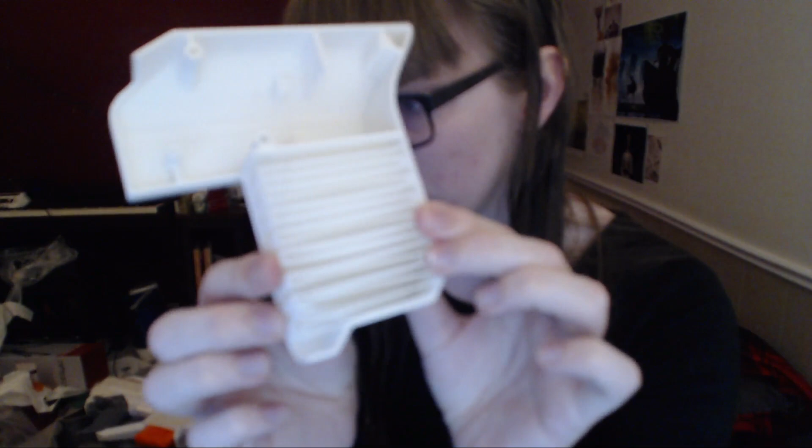Yeah, so that's how the support... come on, holy shit, there we go. So this is how the support was in there. It came out looking like so, hair on it.

Fuck you! Autofocus garbage. Yeah, that's how the support material came out. And this is the inside surface. It's perfect, like there's a little bit of droopage, but it's so minimal.

Have you ever used PVA supports? No, I don't care. The print quality isn't that great, it's alright, but it's mostly because the camera is so blown out.

I'm gonna gut the Titan and put a Rapid Strike in it. I thought it was already a Rapid Strike, or are they using a stupid Hyperfire Pusher? Of course they're using a stupid Hyperfire Pusher. Why did I even ask?

Of course I chose a black dress to do this.

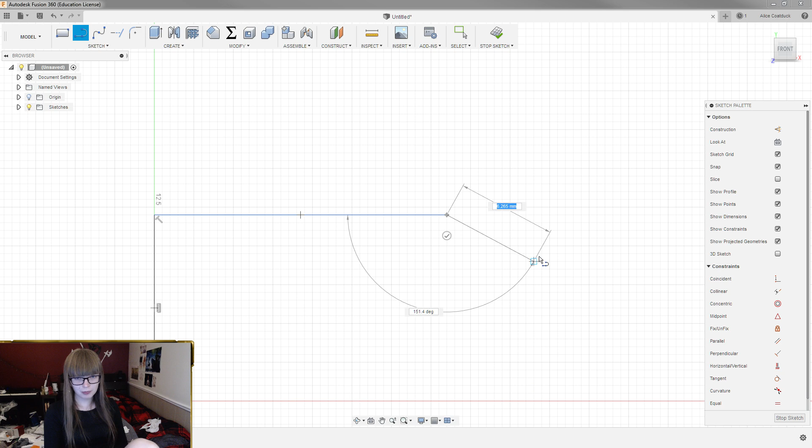Am I dumb? That's 6. So I follow that down. That's 12. Why is that 116.6? 45 divided by 2 is 22.5, right?

Okay, 6.5, so let me go back. Am I losing my entire goddamn mind? Someone explain basic math to me. What the fuck?

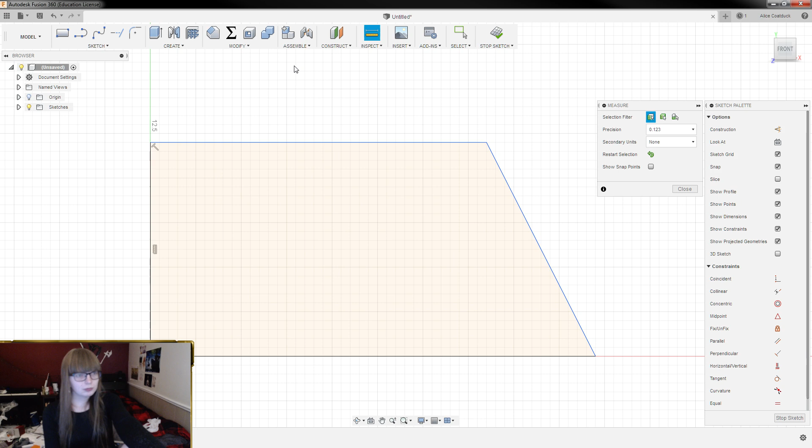Okay, so... what is this? Okay, that's 12, and this is 6. Am I dumb? What the fuck? Is this... I must have taken stupid pills this morning, because this is not making sense to me.

This is 24.5, which lines up with my... I don't... Okay. Okay, so 45 divided by 2 is 22.5. What?

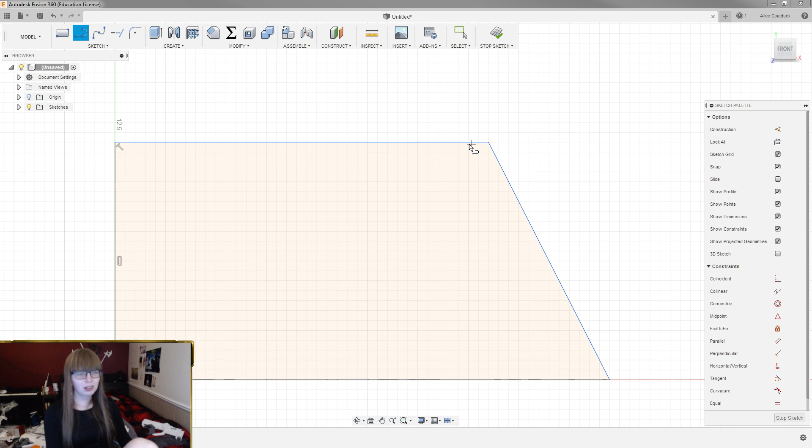That's 45 degrees. Oh. Right. Okay. Slope does not directly translate to degrees. Right. Okay.

So this slope of 1 to 2 does not translate the same way it would be for 45. Okay, that makes sense. Just had to visualize it. Okay.

So then we want to extend that 124 millimeters. So that's our general shape. I'm gonna throw like a... so the slope of this angle, hold on, let me do this and then I'll try and explain.

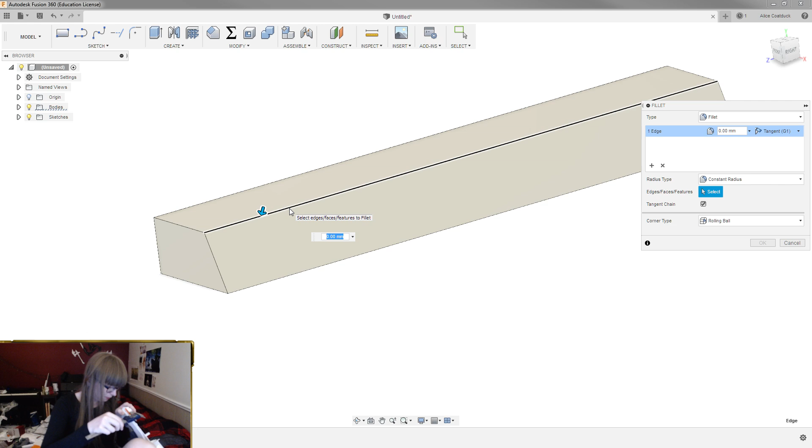It's like a 0.5. So, the slope here, right? So our rise over run is 1 unit, or is 2 units over 1 unit, right? That gets us that angle, right? So it was 12 to 6. 6 out, 12 up.

So my brain's thought was that that is half the angle between 45, because it's double the height for the run, but that's not how that works at all. It's just that my brain needed to look at it to process that. Like, I needed to see the 45-degree angle there to understand that. Just a brain fart.

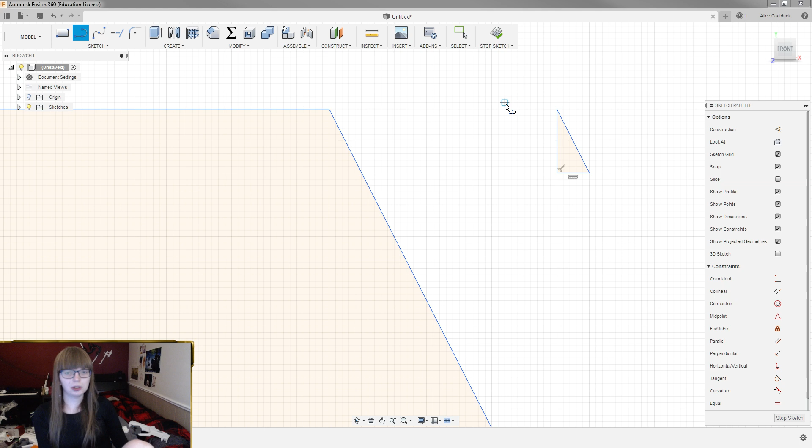Thing on my screen. Yeah. And that's really obvious now that I look at it, because if you go here, that's not half the... if you double that, right? So if you double it again... Actually, that does look shockingly similar to half the angle. There to there is 12.5, and to there is 14. So it's still not half, but I imagine it will approach half as you double it more and more. It will approach half.

So let's double that. So we want to go 4 more units here. And then this is going to be even closer to half. Between here, 6.9 and 7.1. Yeah, okay. Okay. I mean, yeah, it does approach 90, but that's not what we were talking about.

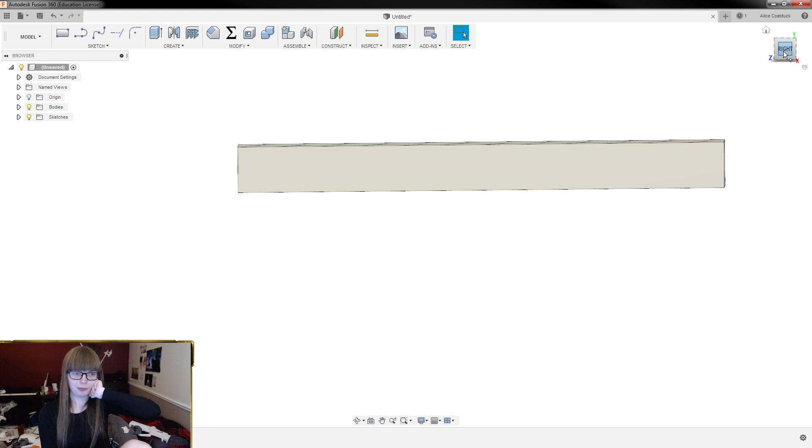There we go. So there is our main sort of body of this filler piece. I really don't think there's a lot to do on it. I probably want to throw a screw port at the back, but it's pretty well supported. There's a screw port here and here at the front, so it doesn't really matter that much. Like, I do want to throw one here because that'll help hold the cage in, but otherwise, meh. I guess I could put one here, but it would look a little redundant. And there's nothing that's going to be in the way here, so meh.

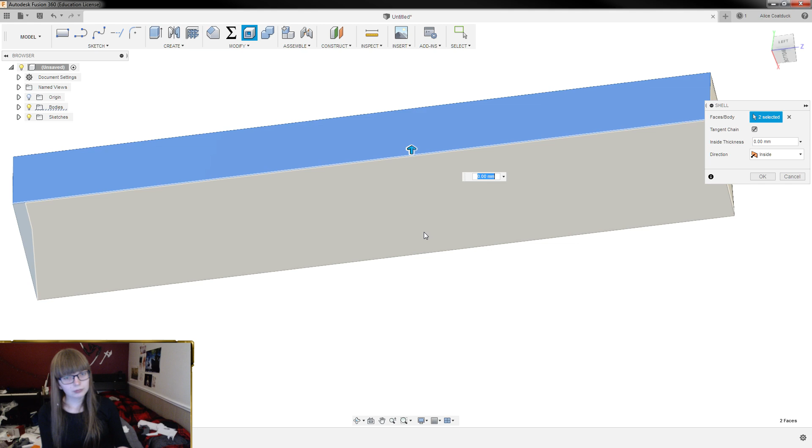Fucking eyeballs. My god. Pythagoras would approve of your investigation. Yeah, pretty much. Oh. Hello, Athaxis, if you're still here and not currently switching an account. 1.5. Nailed it. What did I do to deserve these eyeballs? Wait, Alice, are you going to end war? Yeah.

Oh shit. What was the math there? Damn, I nailed that. Eight, 5, and then 2.8 is what we're going with for screw diameter at this point, and then we want to throw in a 6. So, damn, I'm getting really good at doing these screw bosses. So, we extrude to object. Yep. -2.

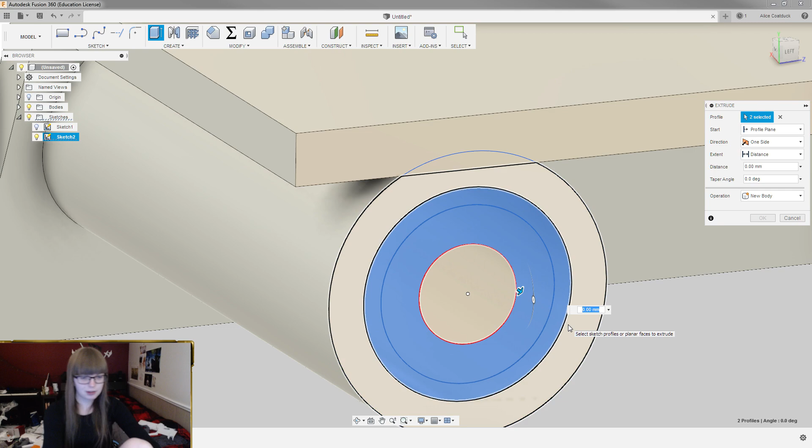Oh. I lied. First thing I'm gonna do is... Hello, please. Punch that out. And then we want to take these and go -2. And then I want to go back in time and not be stupid. And then mirror this body along there. And then we can zoom forward and we've got our piece back. And then we can literally just take these two and extrude to object. Boom.

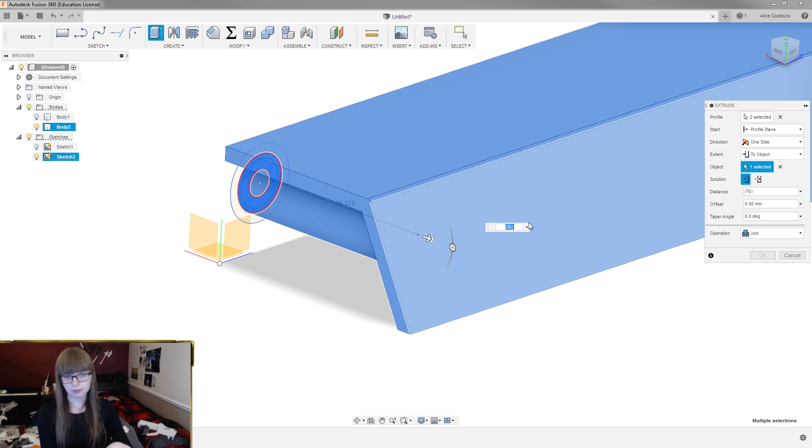Hello. What, hello? And then join. Hello? Excuse me. Fuck face. What the hell? Okay, we're gonna try this again, because that super duper didn't work. It just would not let me hit enter. To object, like so. Thank you, okay. Alright. And then let's go. And then we're gonna trim here and here. And then 1.5, and then flip direction. This is almost done, just for the record.

We are gonna do something, so I do want a rail on the top. Whatever.

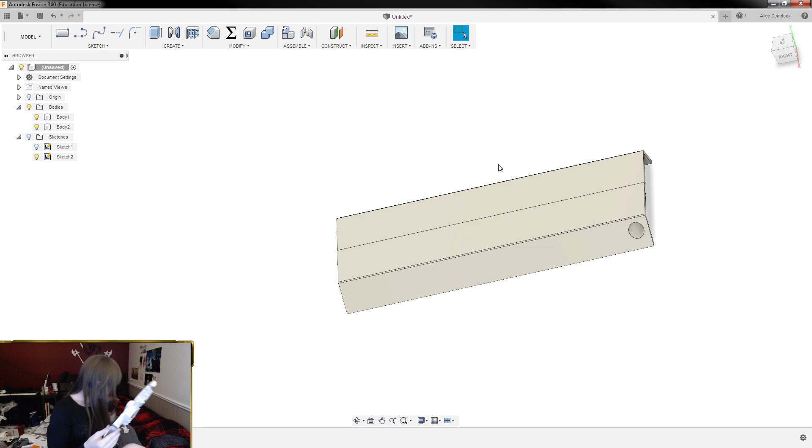I can't believe I'm gonna have to do all that shell work again. It's fine. Everything's fine. Honestly, as somebody who regularly modifies their blaster on the field, the idea of just leaving this top section open is hilarious to me, because that's exactly the type of bullshit that I would do. I would just poke around in there. But I'm not going to.

I wonder if you could design, like, a flip open top or something, so you could open up your receiver and still have it function. That would be cool. It's cool to see inside of this thing while it's closed. I should do clear top plates. That'd be cool. Maybe. Maybe one day. Alright.

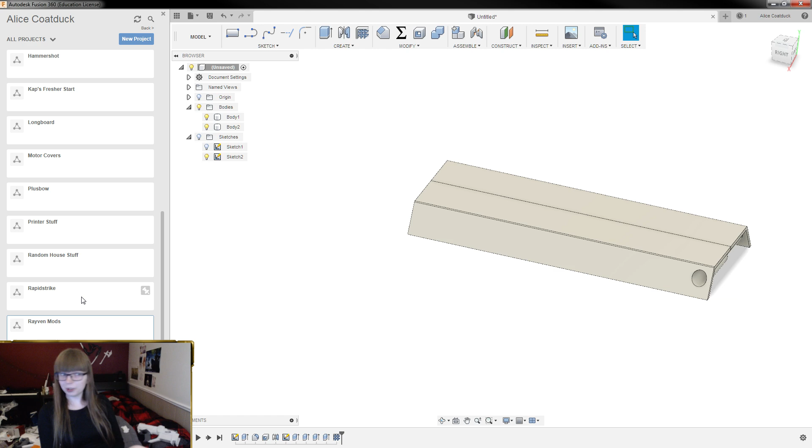Anyway. Okay, so the next bit I want to do is actually not even directly related to a Rayven. So what I want to do is I'm going to go into my Rapidstrike folder. This is something I did sort of a janky way. Oh, this is going to be fun. This is the real shit here. So, I designed a flat top for the Rapidstrike. I think I posted a little bit about it, maybe. Either way, I'll see about bringing it to End War. It's a whole deal.

So I designed this Picatinny rail, which fits actual Picatinny stuff, but it's such a pain in the ass to design. It's just fucking annoying. So what I want to do is I want to make a parametric piece of Picatinny. Parametric piece of Picatinny. Nope, can't do it. That's hard. Okay, where is that?

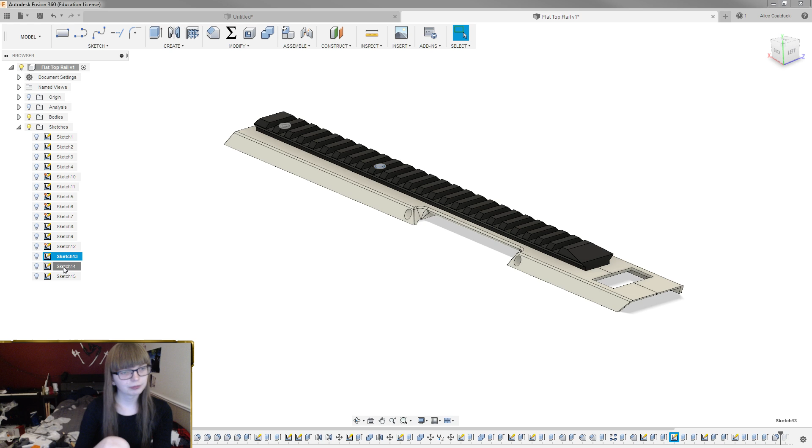I think I did it this way. Holy shit. I really hate those irons. Oh, okay, this looks like a pattern. So we go back here, no rail. Start of rail.

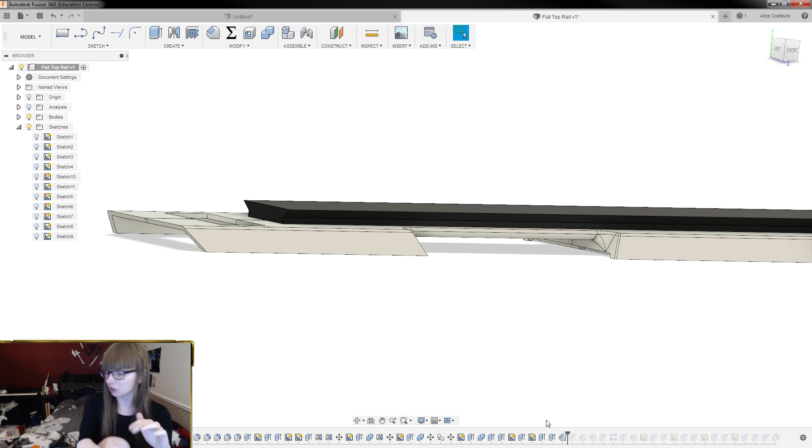So if you have 10 and then you say 10 modulus 3, modulo. I've heard both modulo and modulus. I'm not sure if one is more accurate than the other, but I have heard both. So if you take 10 modulo 3, that gives you 9 with a remainder of 1, so it will output 1. So I have no idea if it'll let me use that in Fusion.

Okay, so that's how I did that. I'm gonna assume this is a 45 degree. Fuck. 135, so yeah, that's 45. If it does, that will make making this Picatinny really easy. Now I'm overthinking this. I think there's an easy way to do this.

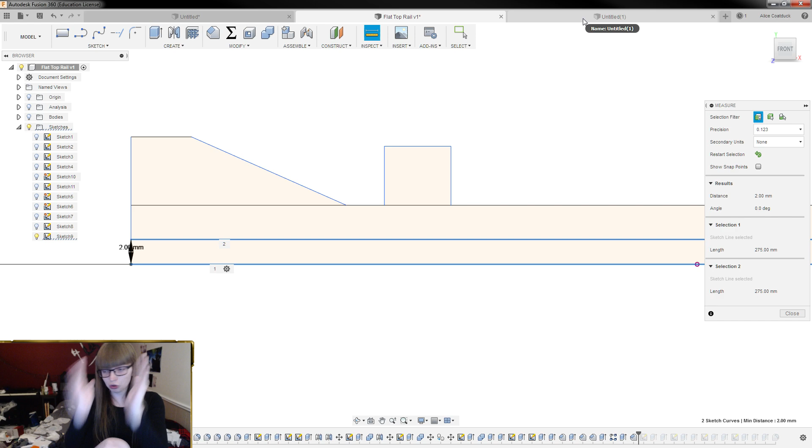On a skateboard, what you can do is you can put your foot on the back and sort of wrench it around corners. But the problem is you can only do that when you're going slow. If you do that when you're going fast, your wheels hit the ground straight away. And suddenly, your momentum has gone from straight parallel to slightly sideways, and it just chucks you off. So you have to do that when you're going slow, whereas on a longboard, you can just... and it's because the angle of the trucks.

Blade Runner wasn't that good of a film adaptation. I actually thought the book was one of those sort of secondary things. Like, wasn't 2001: A Space Odyssey, didn't the movie come out before the book did? I know they used to do that a lot.

Okay, so this is 2 millimeters, and that is 2.75 millimeters.

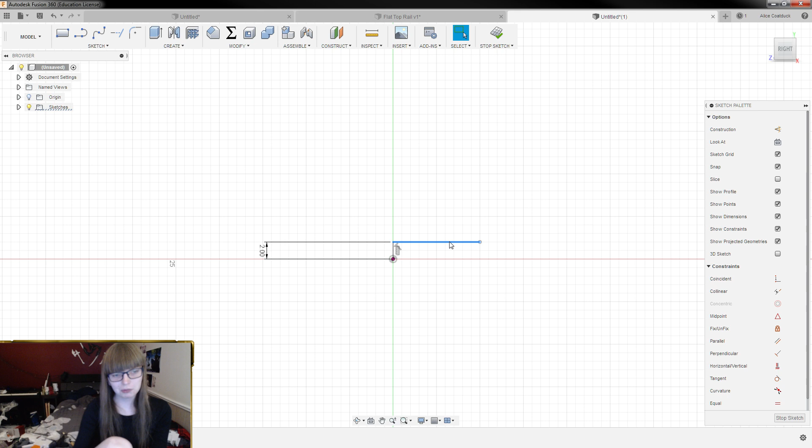We want this to be 4.75.

Yeah, unfortunately I'm sort of stuck with the movie adaptations of things, which sucks, because one of my favorite things, like, I love the Hitchhiker series. I can't tell you how many times I read through Hitchhiker's when I was younger. Oh. Hello.

Hey Justin, skateboards take more skill than longboards. That's not true. That's not even remotely true. They are both an infinite well that you can put as much time and effort into as you would like.

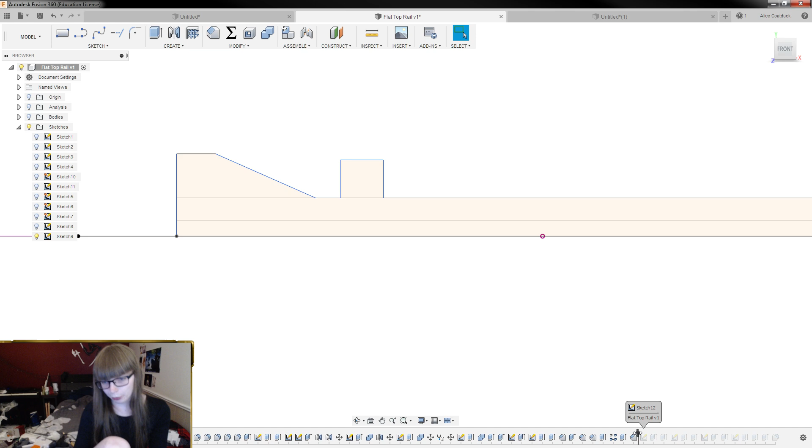That's 3 millimeters, right? Nope, I fucked that up. I gotta start all over again. I really fucked that up. So we're gonna go 10 millimeters this way, and down, and then 2.75 out, and then down, and then 3, I think. Then 4.75 and down.

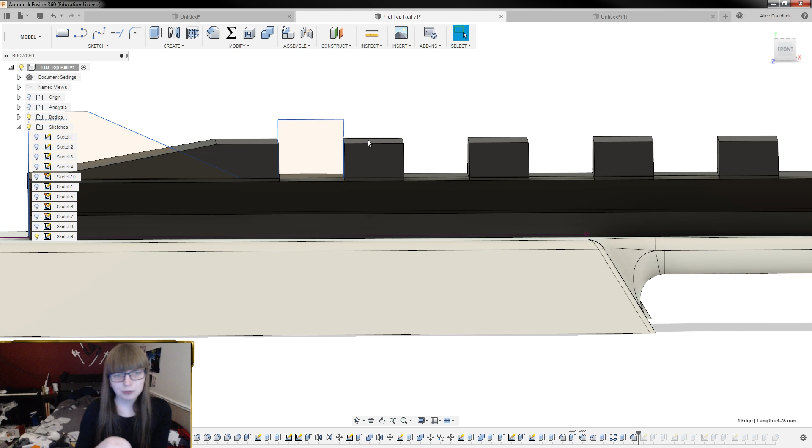And I'm just going to double check those measurements. So that's 4.75. Distance between here and here is 3. That line is 2.75 and that line is 2 millimeters. Yeah, okay, that's looking good to me. I know this is only a little bit off, but it looks really wrong to me. .75, and then down to here and back across, and like so.

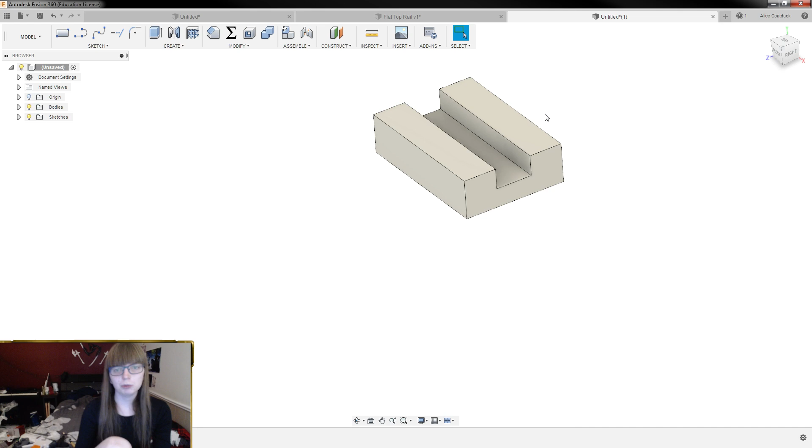Okay, so let's go. Oh, hold on. How long is that line? 21 millimeters, dead on. So we go. Two sides, and then the distance is 10.5. Oh, actually, we want that symmetric. And then .5 on the bottom, so that's 7.75 at a guess.

.5. That was right? Yes. And then .75, right? That will give us the right. Yeah. And there we have a piece of Picatinny. And we want plastic, opaque, matte black. Dude. Dude, what the hell?

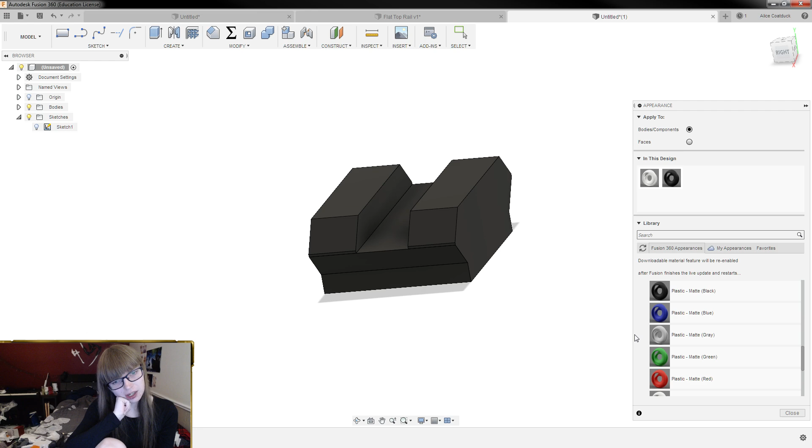Alright. So each unit of Picatinny is 10 millimeters, right? So here's the fun bit. Actually, hold on. Before we do that, I'm gonna go in and change something. Howdy! Alright, so we're gonna change how this was done. Yeah. That's fine.

Oh, hey, Eleanor. I just entirely missed. You guys showed up right as I got done the modelling.

Alright. So let's go in here and symmetric. I'll do. Actually, I want to do this a little more precisely.

Interestingly, I actually have been absolutely obsessed with Dune lately. Just so good. That didn't make sense. Whatever. Fine. I don't care. Whatever.

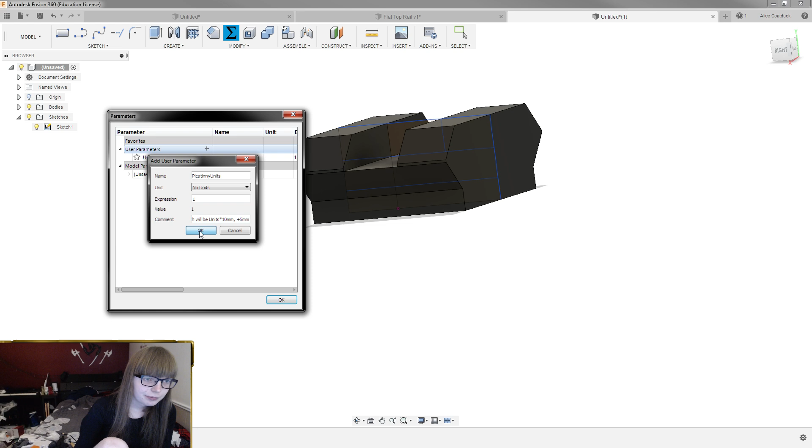So let's create a new parameter. So let's add a unit. I don't know how it's going to deal with this. Picatinny units, and I actually want no units here. And then by default, it's going to be 1. Enter comment is: final length will be units times 10 millimeters plus 5 millimeters. And I do have it as... Why do I have to stretch it out this far to get this? So now what we want to do is extrude this, and this extrude

No, I said Dune. D-U-N-E, not Doom.

But, we want to extrude this 10. No, we don't. Yeah, okay, so 10 times Picatinny units. Actually, we want to do Picatinny units minus 1. And we're going to have to change this expression to 2. So 10 times bracket Picatinny units minus 1, close bracket.

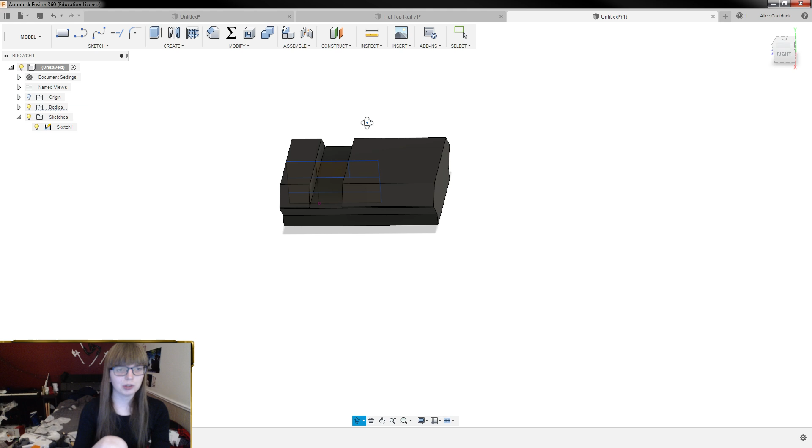So minimum expression. So minimum size is going to be 25 millimeters of Picatinny, which is fine. Yeah. So then we want to pattern a linear pattern, or rectangular, and we want to pattern a feature that is that one. Distance 10.5.

I think all my moderators are here. This is when... Picatinny, not M-LOK or KeyMod. Eh. Yeah.

Nope, shit. Okay, I fucked up. I was, like, really confused for a minute there. So we want a rectangular pattern. The object we want to do is that one. The direction is that. And we want to go every 10. And we want this to be spacing as well. And the quantity we want to be, actually, I think just Picatinny units. Distance 10 millimeters. I actually think that's right. Hesitantly.

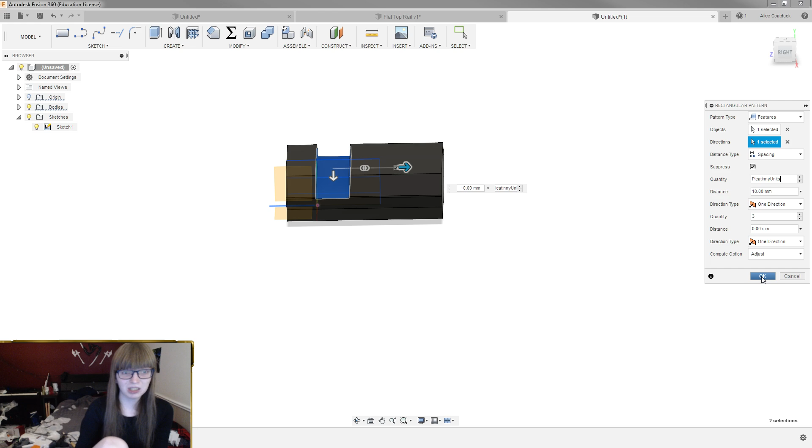.7 or 4.75, and this should be 5.25, and this should be 4.75. Yep, okay, so that is working at the moment. So now we want to say, we're actually gonna, minimum 2 units. So we just add that little description. If I say I want 4 units, that'll give me 45 millimeters of Picatinny, and fuck. So we don't want a quantity here. We want a Picatinny units. And we want this to be spacing.

Okay. So then if I do 3. Alright, so that gives me 35 millimeters of Picatinny. But then if I go up, if I go to 5. Woo! Okay, so let's go back down to 2, because that's our minimum.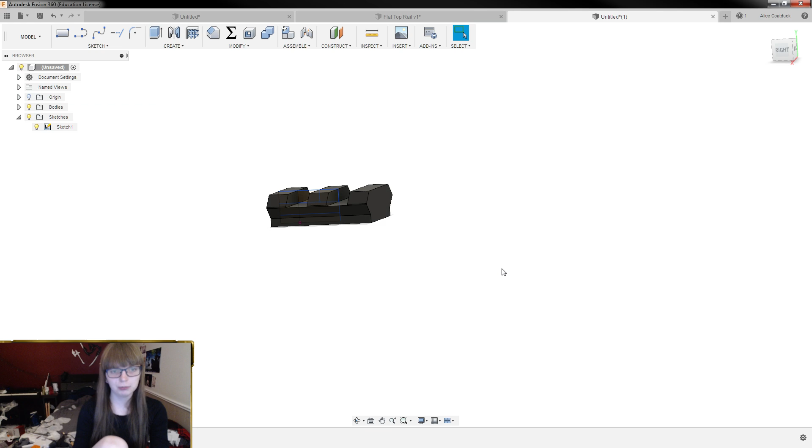And then how many do we want? We got... That'll give us 125 millimeters of Picatinny. And then back down to 2. And there we go. Now, I do want to try and break it. See what happens if I go down to 1. Yeah, so not good things.

But yeah, this is a parametric piece of Picatinny. God. Parametric piece of Picatinny, parametric piece of Picatinny, parametric piece of Picatinny. Oh, got it. Nailed it.

Okay. So the location, we're going to throw this in the bits folder. Misc parts. Cool. Paratini. Well played.

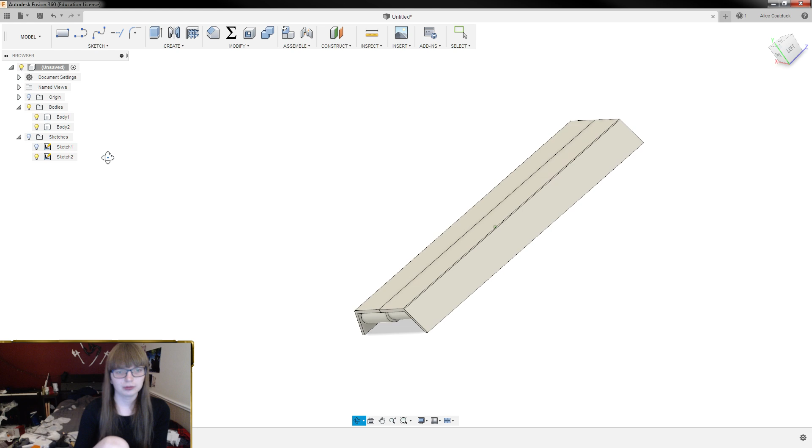So, now if we go into our bits folder, misc parts. Damn, I got some nice bits in here. Hello? No? Oh, okay, right. I have to save this. Not in misc parts. We want to save this in Rayven mods. And this is flat top.

Alright, so we want to place this. So, if I recall correctly, I did that facing the right. So, I'm going to want to rotate this 180 degrees. Which is going to seem weird, but trust me, I'm either right or wrong on this. Alright. Alright. That looks good. Okay, I'm starting to have my doubts on whether I did this correctly, but whatever.

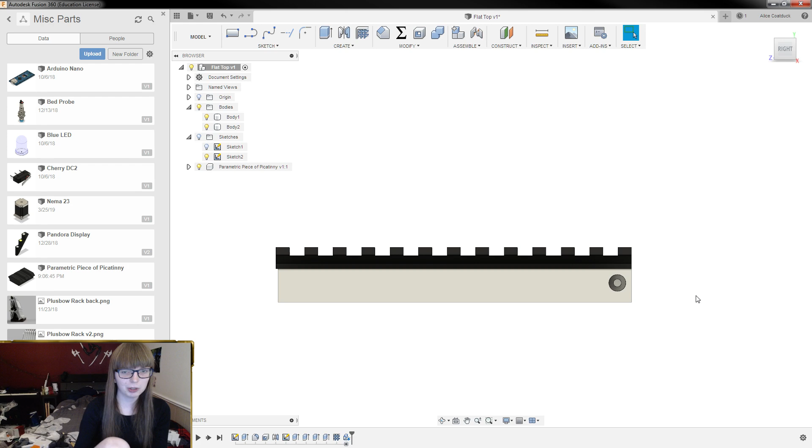So that should have imported this parameter as well. So if we make that 12, that'll give us 125 millimeters. Ooh! Nailed it! Okay, I'm pretty proud of that. So... Okay, that was awesome. Yeah. I'm probably more proud of that than I should be.

Okay, I just realized I fucked something up. It's not world ending. Will be a little bit annoying though.

Really? That one? Like, half a dozen good ones. And you went with that one. Thank you, Wick. Also, hello, Wick. I don't know if I said hi to you. I don't know if you just showed up. I have been a little frazzled. Scatterbrained. Which is also a fantastic song that makes me sob like a baby.

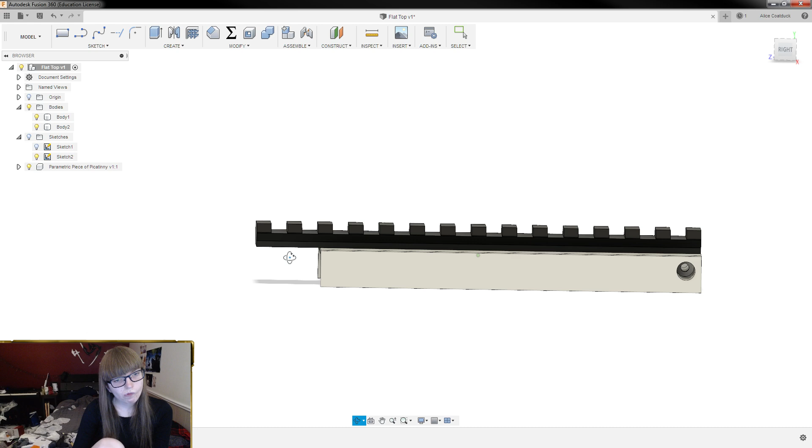Alright. Okay, so I'm actually gonna drop this down another unit. And then, so what I forgot to do is there's an angle at the back here that I just entirely forgot about. Yeah, I'm a big dummy.

Remote blaster is perfect to get for an upgraded scout. Oh, okay. Well, fair enough. Shows what I know.

Okay, let's, I think, scoot this forward, I think. I'm not sure. And this is when Edskar mocks me, because what I'm about to do is model the top of a Rayven. Wrong blaster.

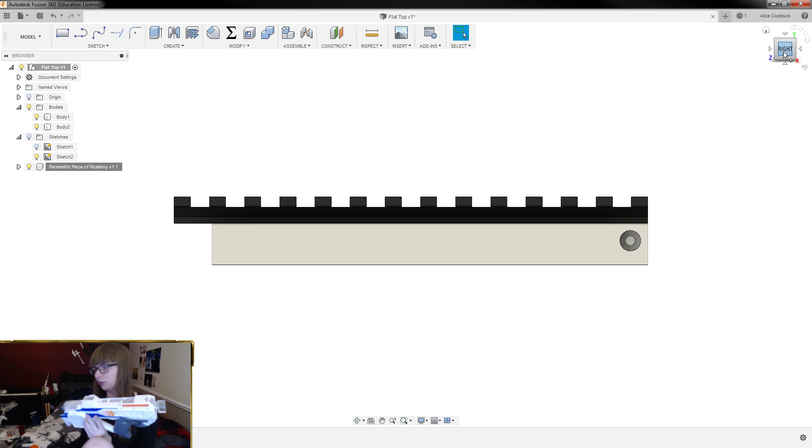I really need one of those digital angle gauges because the amount of time that I spend trying to figure out angles poorly, it's unreasonable. I went to go buy one day and I just couldn't find them anywhere. I think I checked like 4 different stores and they were all out of stock. It's just like the universe doesn't want me to have one.

Jesus. That's horrific. Gunshot not illegal. Panda makes a fair point.

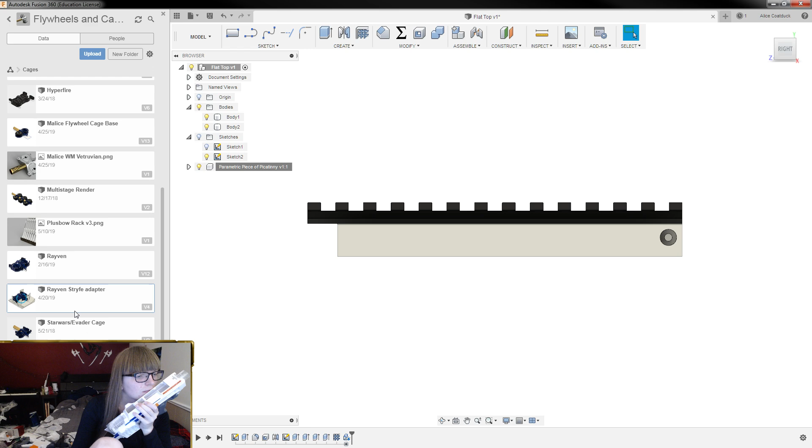Okay, what the fuck am I... Like, there's nothing to get the angle off of. Like... Fuck! Fuck it, I'm eyeballing it. Wait. I think I have the inside of the shell modeled over here, so I can yank it.

And that angle is wrong. A little too dramatic. But we'll see about it as a start. That angle is 100 degrees. Okay. So it's probably 10 degrees. Ish. Maybe 8. At a guess.

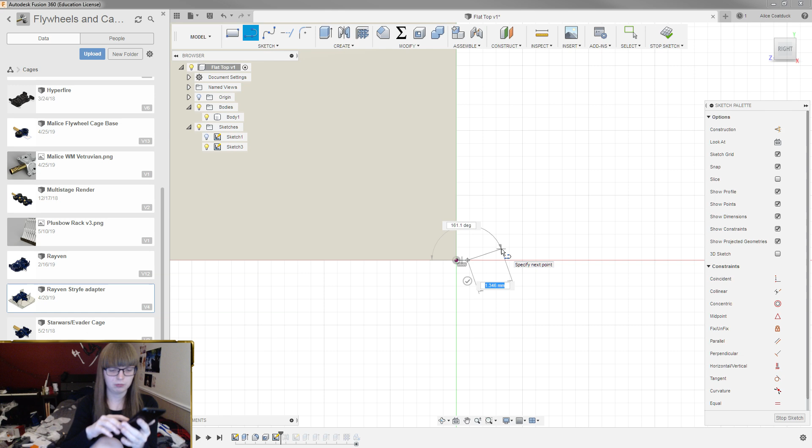That sweet ABS high. Do I want to know? Oh. Hello? Oh, okay. I'll be up in just a second. Phone call. Somebody ordered food to my place. And yes, I am listening to home.

The food gods have smiled upon me this day. It's my favorite pizza place. I'm actually reading the... Oh, fair enough. Hey, Chris, do you want to shoot me a PM about... I missed it. Oh, I am so pleased right now. I am so pleased. Really good.

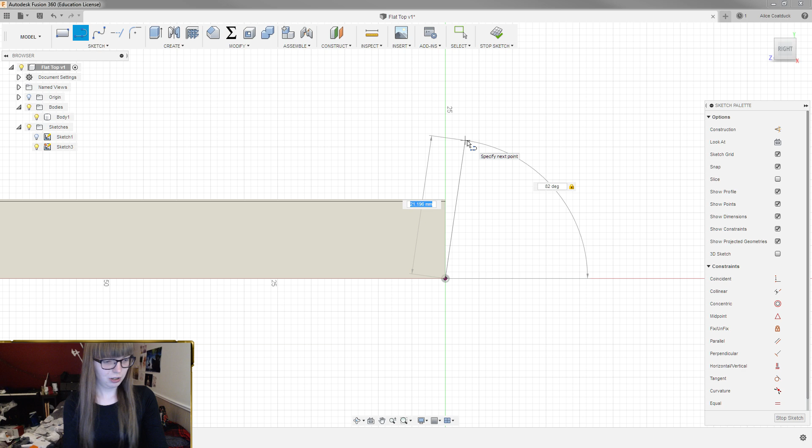Okay, so it goes up to like here-ish. Whatever. I'm just gonna trim that there and there. Hello. Why did you do that? It didn't. It's just being an asshole. What the fuck is that about? Oh, it's that line. Okay, that makes sense.

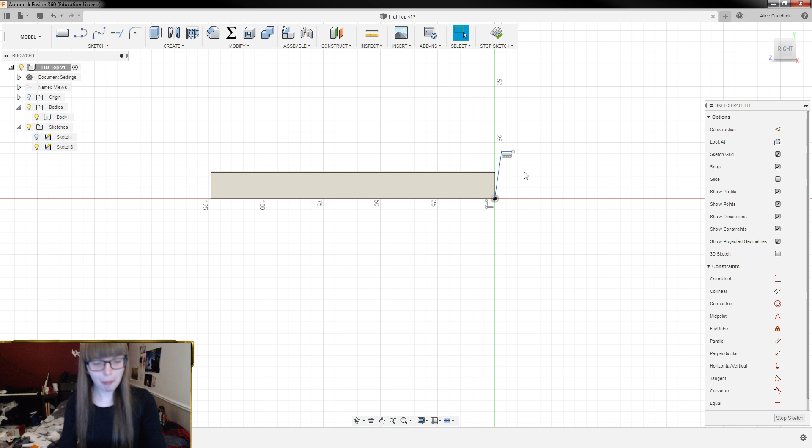Oh, that pizza's good. I love you guys. Holy shit. Goddamn delicious.

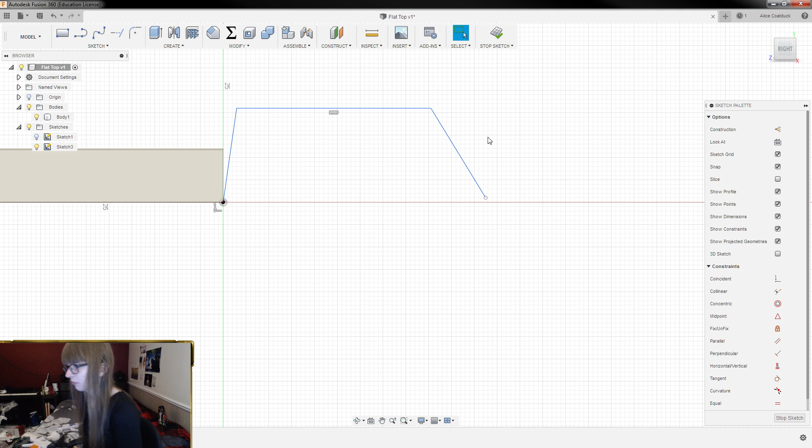And how far back does this go? 42.5. Alright. This is like 12 millimeters-ish. Yeah. Okay, so that's 12 by 20. Over 20 down. Nope. Fuck. All right.

Fuck, this is good pizza.

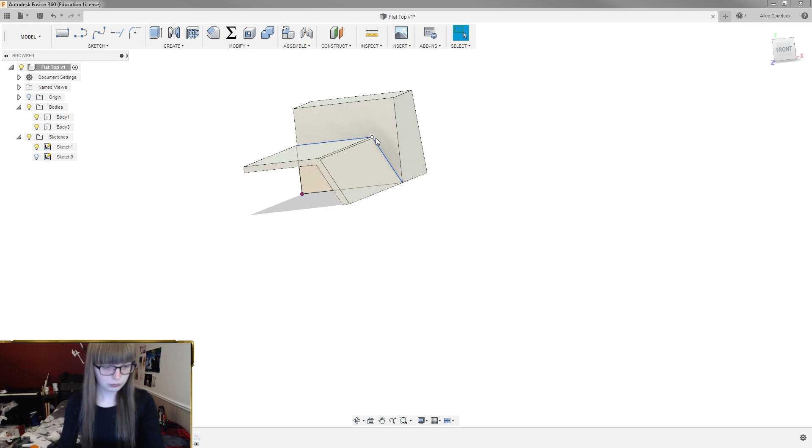All right. 24.5, and that is, in fact, set to new body. Wait, no, fuck. All right, so that's roughly the shape we're talking about here. 1.5. And then, honestly, the front is really...

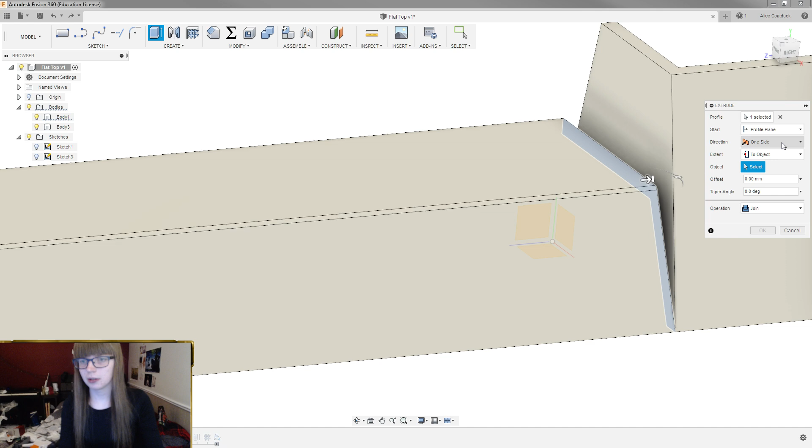So we're gonna go to object, and then like that. Nope, that's not right. To object. And then the object in question is that. And then I guess we want to do body, or maybe we want to hack it. Was that cheating? Definitely. Do I care? Definitely not. The hell? That's not a bad deal. All right.

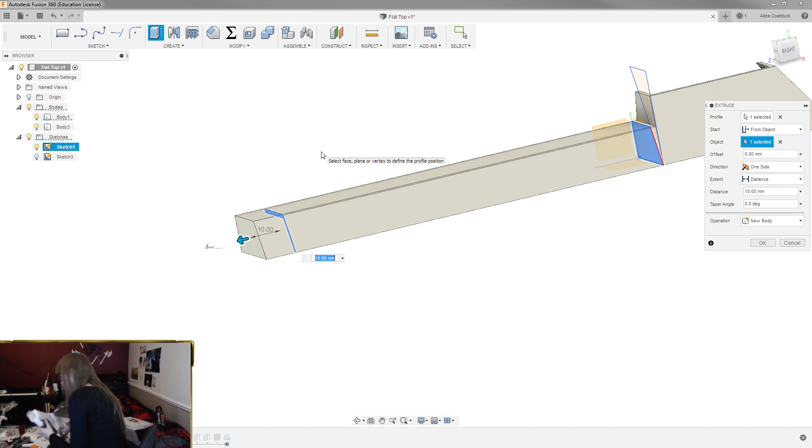Let's go from object. And we want a new body. And then we want it to be .52 millimeters long. And then have a good old chamfer. And that's going to go all the way to the bottom, yes. Probably all we need, however, when do I ever settle for that?

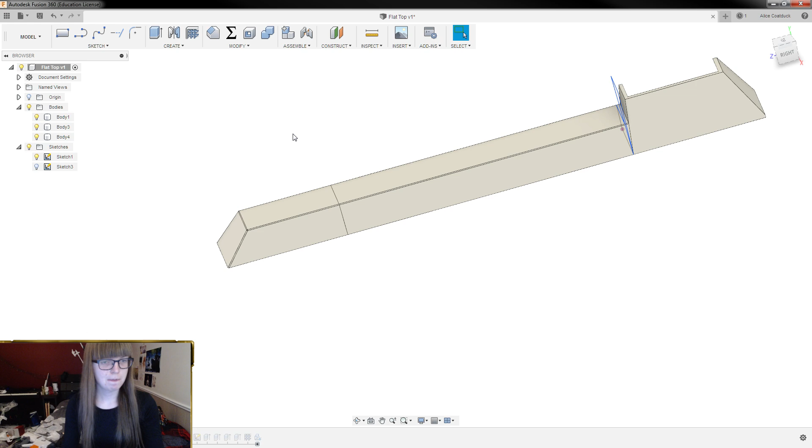21, 25, 21. So we go 21 back, and this is 22 wide-ish. 21 back, 22 wide, and then we'll figure out the next bit in a second. So that's 11 out and 21.

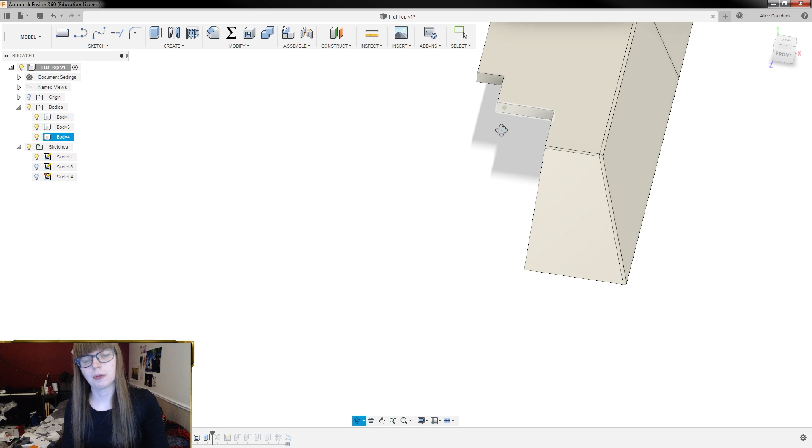And then the next bit is 6.5 back and 7 wide. So that is 3.5 wide and 6.5 back. Take that back here. Connect those up. And then we want to shell on these sides. That's 1.5. And go from here and make it parallel to this.

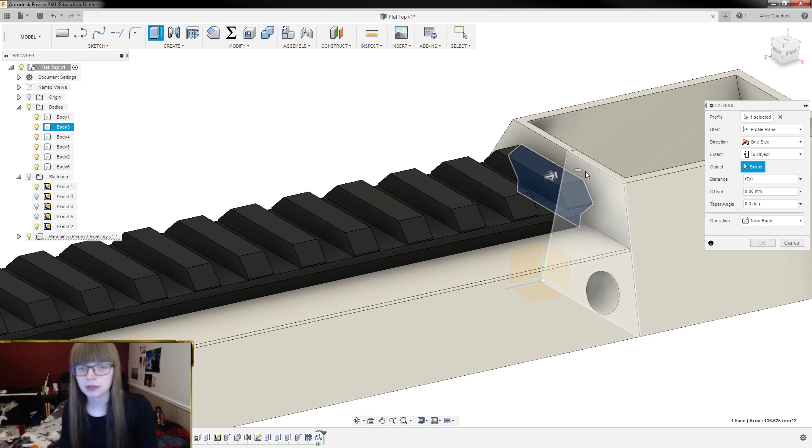Alright, so that's a rough approximation of the top of a Rayven. And then we go forward, and then we also want to take that and that. So now we zoom ahead to after we have our rail in place. I think we're done with our sketches for now. And then we want to go to object, like so. And we can only pick one, but it looks like it's going to work anyway. So it's fine.

I'm gonna get some more milk because that pizza is delicious, but also pepperoni has salt in it. Alright. I return. Sorry, I had to open a new thing of milk. Alright.

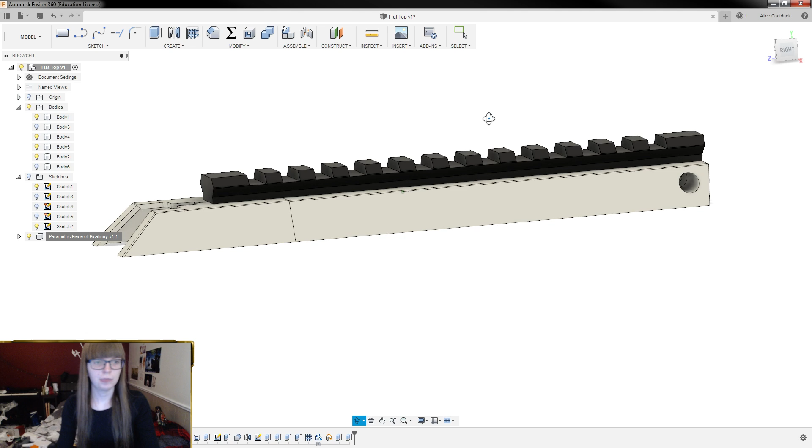So let's, and that looks like it did work. So that's handy. Let's go out to 14. See what that looks like. No, I think I was right with 13. So that's a 130 millimeter length of Picatinny, and then no, that's not right. Okay, let's go back 2 steps, and then we're gonna take this and we're gonna move it just a bit. No, what the fuck? Capture position. And then we're gonna move it. Yeah, that looks better.

And then we will, crap. I'm gonna open up the Rayven or Rapid Strike bit again just to double check. Flush with the top back so it's perfectly flat. I don't like that. I think that would hurt the lines of it, and it would also make it more difficult. Like, either I would have a really tall piece of Picatinny, which I wouldn't like, or I would have to raise the entire top section here, which I also wouldn't like.

I just want to look at how I did the front of the Picatinny on the other one, because I thought it turned out decently. Yeah, okay. So I went down to the bottom. So I want 2 distances, and then this distance is going to go down to 575. So, no. And then I kind of want to match the front angle here, at least relatively speaking.

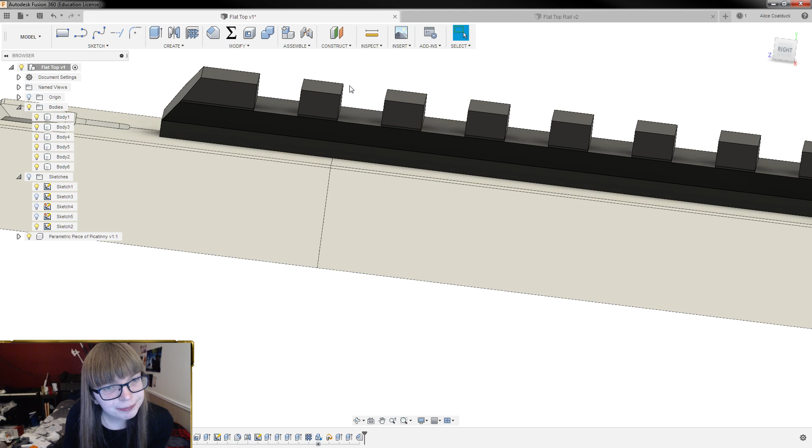Okay, if that lines up perfectly... this little bit, I don't know what instrument it is, but it always sounds like, what's it called, in the Toy Story video game I played on stream a while back. I don't know if anybody remembers that, it was dumb. There's a bit in the soundtrack that sounds exactly like alleys and gullies.

Can we go down to 5 here? We can go 5 point... fuck it, let's go 6 and just make it up as we go. And then let's throw in our 2.8 millimeter. Actually, I think I want to throw in a 3 as well. Excuse me, and then a 5. What's the depth here? It worked out really well. 1.5 millimeters deep.

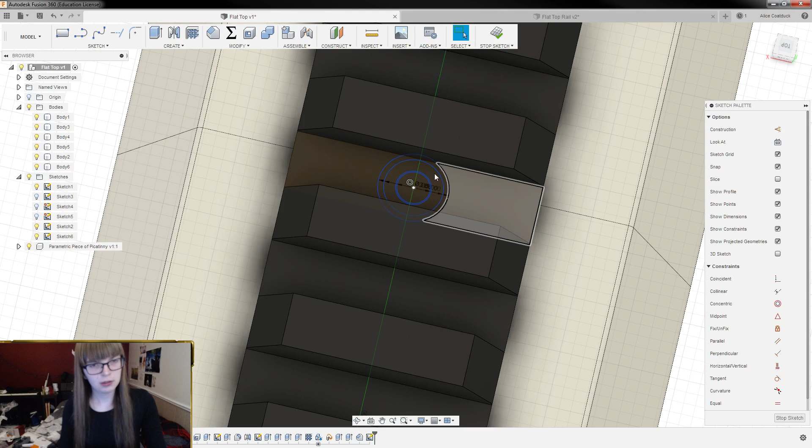Alright, so there's a 5 millimeter circle, and then we want to punch this down minus 1.5. Actually, let's also throw these same bits back here. .25, and then we want a circle at the midpoint that is 6. This might be cutting it close. And then 5, and then 3, and 2.8.

Actually, I'm going to delete that line just to make selections easier.

Ah, I had a sneeze and it passed. Keeps happening, like it's been happening an alarming amount lately.

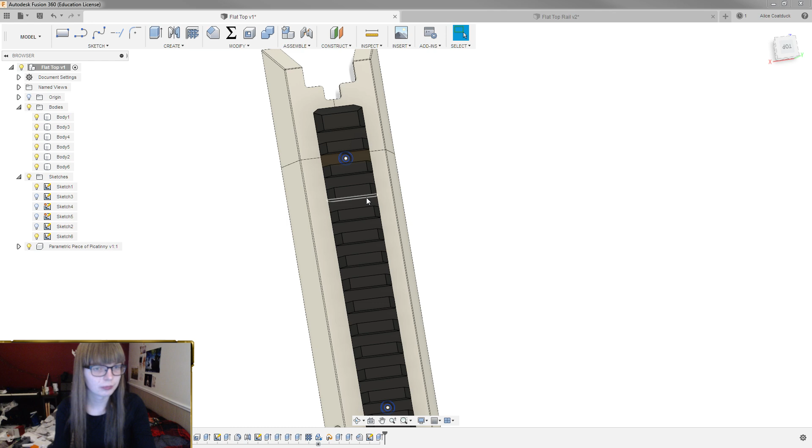Select these two, and then down to here. Objects to cut, we should only have 1. Correct.

I'm gonna come in and do... oh, looks like I'm gonna have to come back in. And then, hey, what? Oh, right, I was really confused for a minute there. And that should only be cutting 2. Yep, correct. Oh ho! Actually, this should work.

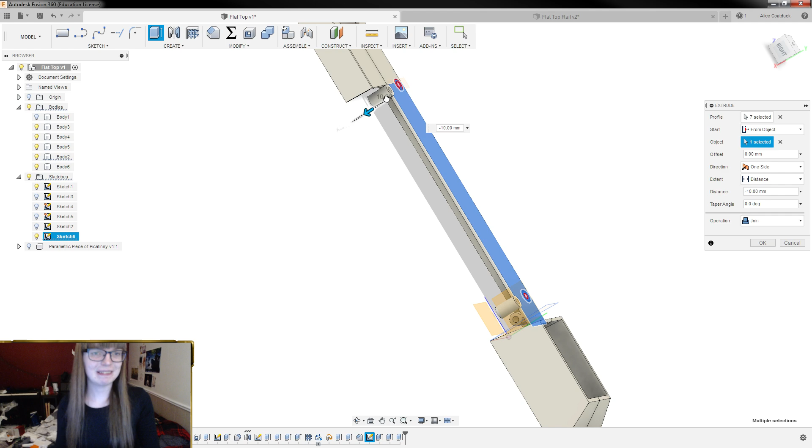Fuck! Keep fat fingersing this button, it's annoying. Let's go 6, because why the fuck not? It will push the shell apart like that. Making a screw hole, I suggest 2, 1 on each side, each half of the shell. Push the shell apart like that. Try to...

You might want to check out what I'm doing. Fuck. I did fuck that up, but... yeah, you should check out what I'm doing, because I know that this works, I have a version printed and assembled over there, on a different blaster granted, but, so we want to go from object here, and then we want to go down 6.

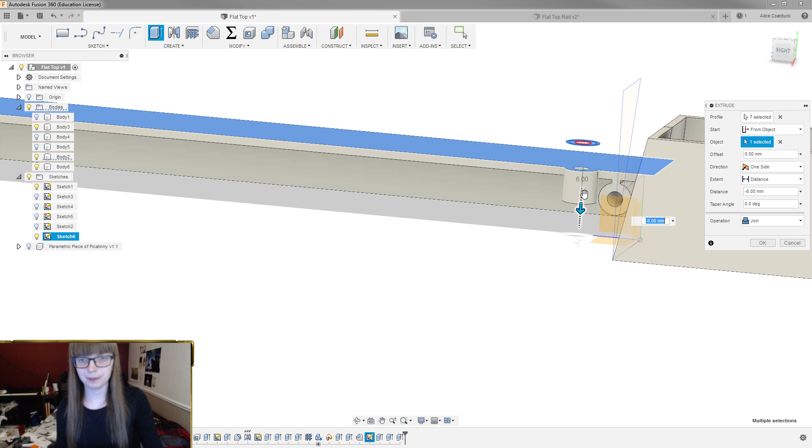Screw ports on just 1/2. Yep. Because it's getting screwed together, it only needs to get screwed to one side. Yeah, I've got it on a... hold on, spoilers for upcoming video and whatever, but blah blah. That's how it works on this thing.

I need to fix that. Yep. But yeah, it's a little loose in the center, but that's mostly because I couldn't put a screw port there, had to avoid the flywheel cage. But yeah, it worked fine. Pizza time.

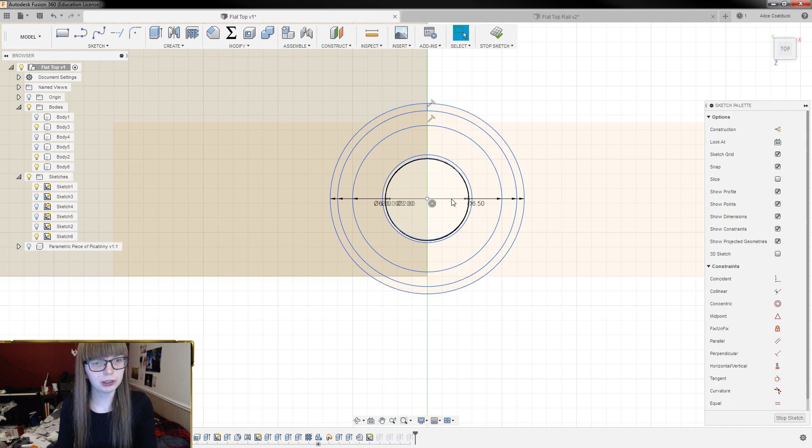What the fuck? What was that? How did that even happen?

Actually, I definitely didn't have to put those little lines in, but whatever, it's fine. Let's double check the distance between here and here. It's a little thin, but it should be fine.

So, alright. Alright.

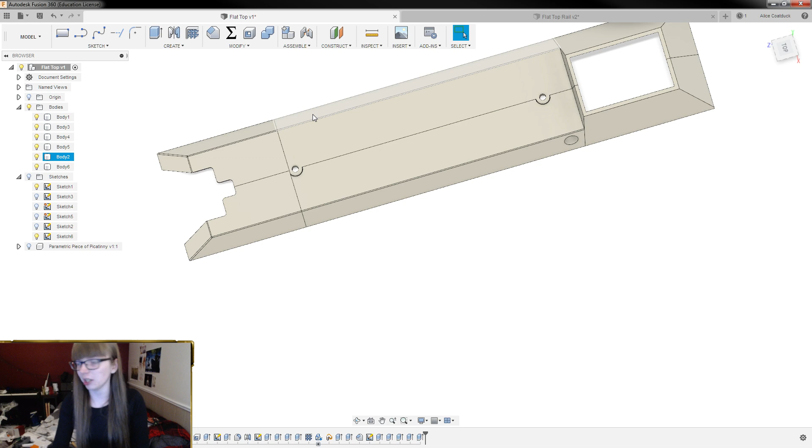So, there's a little clearance between here, so that the two don't interfere in any way. It'll also help them lock into position. It bolts into the shell half, so it screws in, so that when you open it up, it stays in place. That's why I didn't go with 2 screws, because in order to take it apart, you would then have to take out 2 of the top screws in order to do that, and that's a pain in the ass, and I would forget about it and wrench on it and maybe break something.

But I'm actually pretty pleased with that. I think that's looking good.

Now, let's see what the top of this section looks like. I'm gonna put my fucking calipers. Okay, so this is 25.5 wide and 43 long.

I may have fucked this up. Oh, I did. It's just the height's wrong, it goes a little taller than this.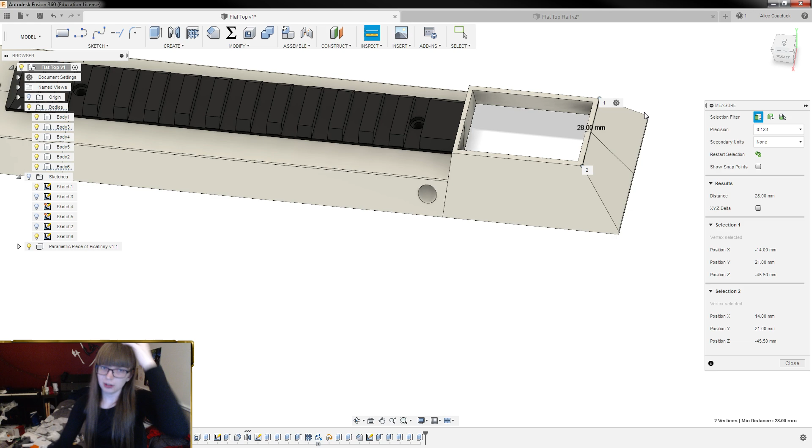I think what I'm going to do, because I have to design a panel for the top of here, won't be terribly difficult. There's no point, it already indexes really well. The screws going through works. You then have to get the tolerance between the inner post and the outer post right. I was planning on printing it in this orientation, so anything sticking up over the top would mean this entire area had support material, which would be gnarly. It's essentially going to be the bottom of this attaching to the bottom of this print, so I don't have any room to go up. I've thought about doing separate V pieces so it would locate in the top and bottom, but that's so much more complex, and really it's trying to solve a problem that isn't really there. I'm going to finish this slice of pizza and then go for what I assume are cookies that came with this.

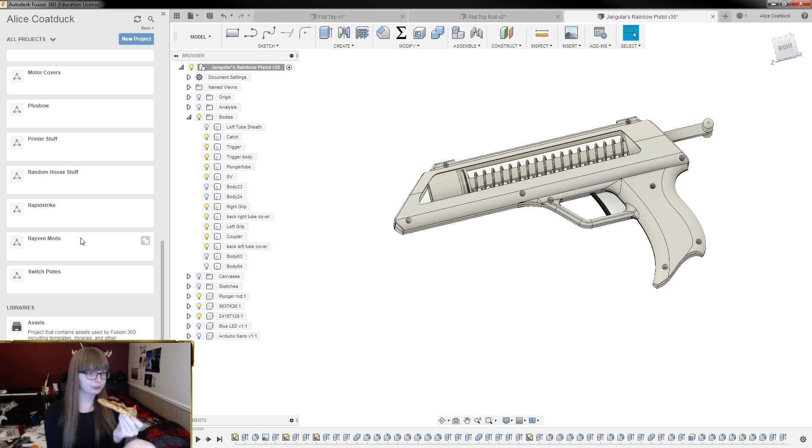And then I also have... come on, where is it? I saw it earlier. There we go. I also have this, which, for the record, is actually almost nearly done. Almost nearly, I recognize as... whatever, it's nearly done.

It's not based off of anything from Warframe. However, I did develop a lot of my style working from the lead art designer on Warframe, art director rather, Minky. We're pals now, so that's pretty cool.

Looks like a Falcon Fire. What the fuck are you talking about?

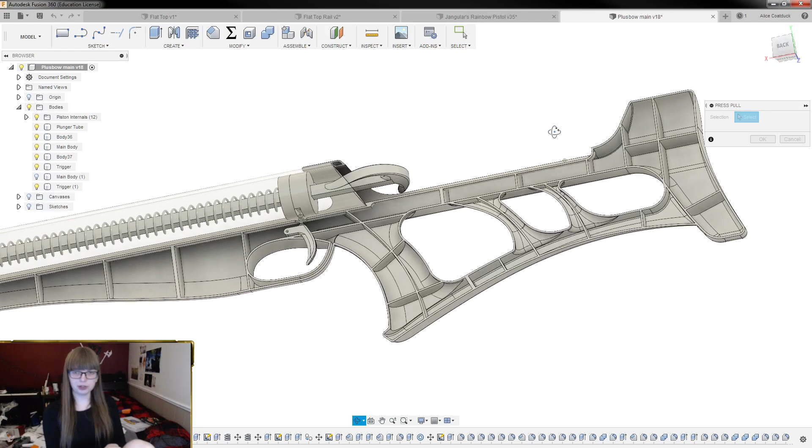Yeah, there you go. It's nearly done. So I need to put in support for the trigger, and then I also need to put in screw ports so you can open and close it properly.

Like an Alpha Hawk? What? I mean, maybe it has a vague shape that's remotely similar to an Alpha Hawk. Yeah, the Alpha Hawk does have a thumb hole, but that's pretty much where the similarities end, my guy.

Yeah, so probably gonna have to throw a screw port there and there and there. Probably one maybe here-ish, and then some down here probably, and there and one there, and right there would be good. Yeah, just spitballing though.

Damn, I like that pole design, I forgot I did that. Almost definitely won't work, but damn if it's not pretty.

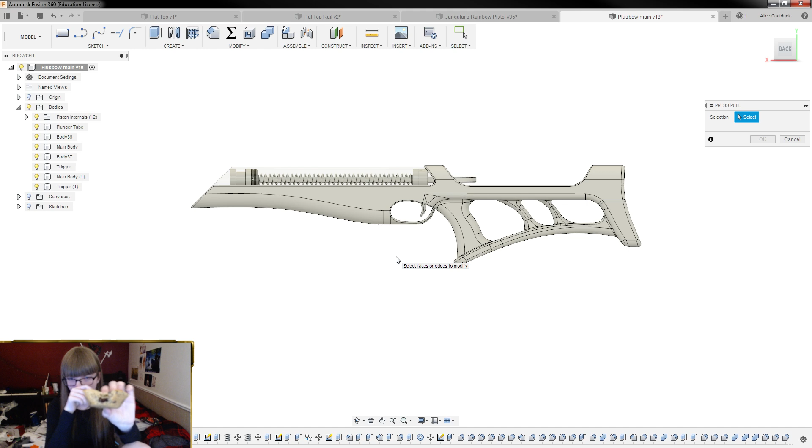The fuck is this? I thought it was like 2 cookies stacked on top of each other. I might bet that there's like a gooey center there. You bet your ass it's full of Nutella.

Hello, please. Wow, it's just really not loading in, is it? Wait a minute. Okay, there we go, I don't know what the fuck was up with that, but...

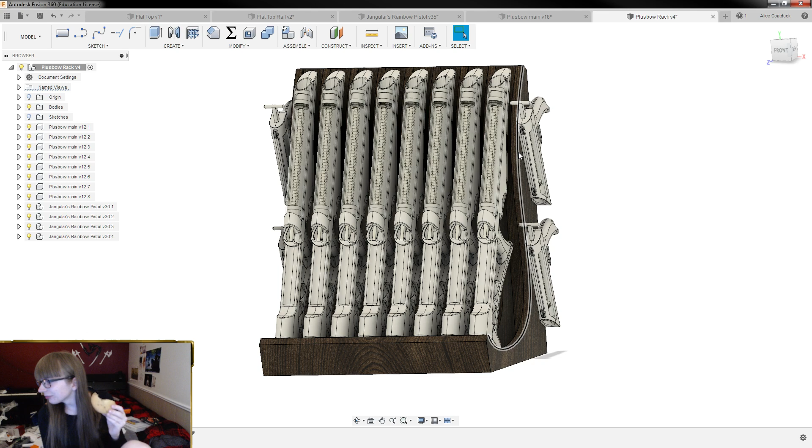No, this shit looks impressive. Yeah, maybe one day.

No comment, of course it's my moderators that make these fucking comments. I think that probably speaks more about me than it does about them, but whatever.

That's weird. At a certain angle and distance you can actually see through it. It's real weird. But yeah, this is, if you want a Springer, oof, that's real sexy.

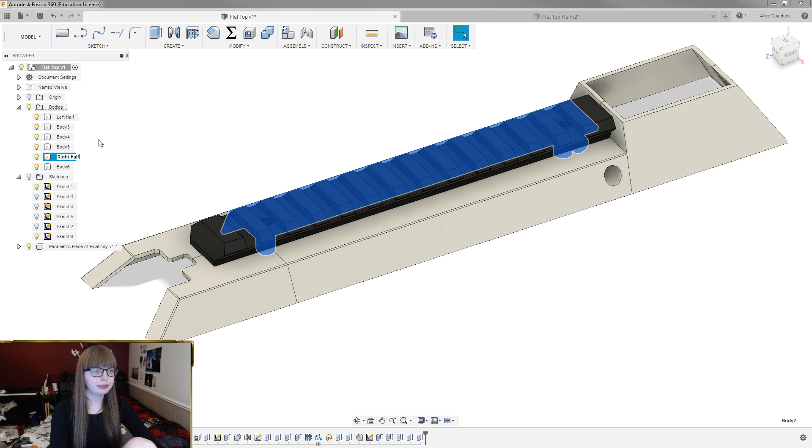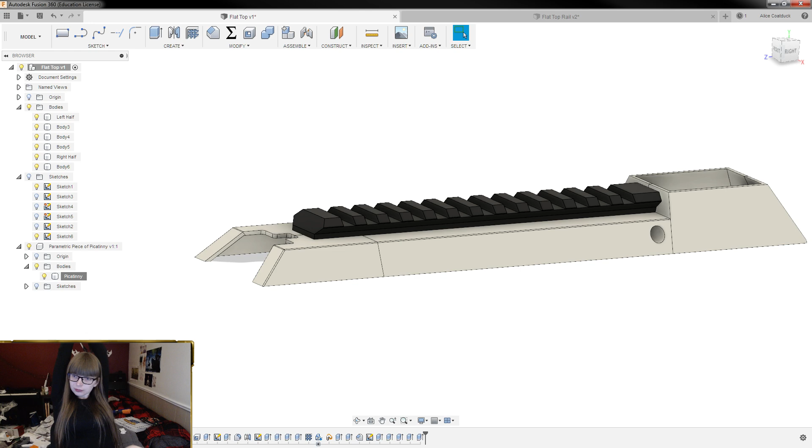I'm probably going to print that right off. Actually, what I'm going to do is run and grab that part off the printer. It's been more than long enough. I'll come back and play with that, and then we'll call it after that.